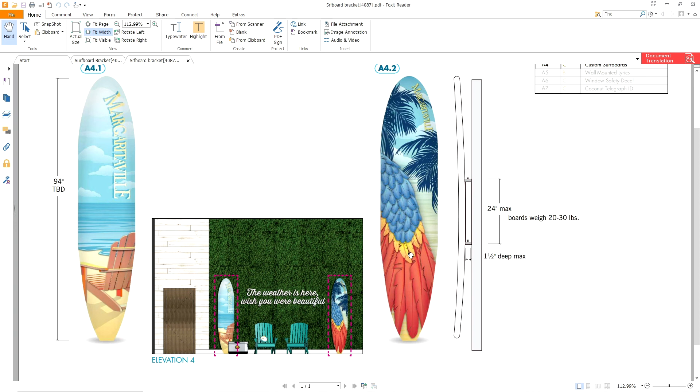So supposedly the surfboard has a spar in the back of it that's wood, and they want a piece that attaches to the surfboard and another piece attaches to the wall. So they kind of were spitballing with this idea. So we have 2.5 wide here. They've got 1.5 deep, and they thought maybe they could have this sit inside there, and then this will kind of keep it from rocking. And it's all kind of a good idea,

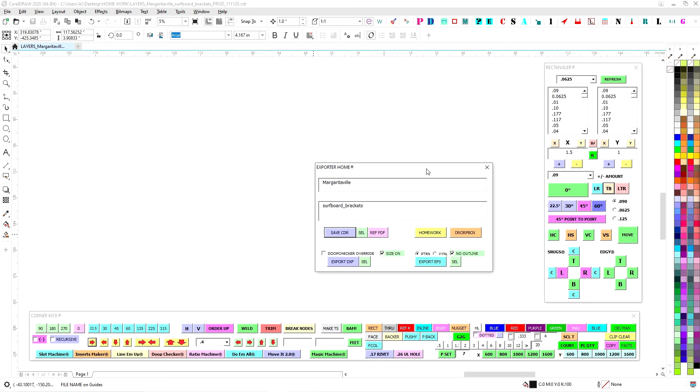but the actual construction of something like this to hold something up that weighs, what did they say? 20 to 30 pounds, just by this little tiny thing, kind of magic system there that doesn't quite exactly work. But they want to keep this stationary, so I understand. So I had a quick idea. So what I'll do is just hit my Margaritaville, and we'll just call this surfboard brackets. And we'll save it. There you go. So that just dumps it into my homework folder, so it automatically saves it without having to do all the nonsense.

All right, so first we're going to create a rectangle here. Since it's 24 inches max, let's just go ahead and use that. And they want 1.5 inch maximum. So I'm going to do my left right here. I got it set for 090. And what that's going to do is give me a bracket that's already set like that. So that gives me a 090 on one side and 090 on the other. And it's all to size, and it's already converted to curves and everything. So I get rid of that. So now I have this piece of angle here.

And then what I can do is use my extruder. And I believe they said the wall bracket would like to be 2.5. Yeah, we'll take it. We'll take everything we can. So I'll go over here and go 2.5. And over here I can just go ahead and hit that, and that gives me 1.5 by 1.5. And then that gives me my profile extrusion. I'm going to hit this button here, that turns to 270. So that way we're good to go. And then what I like to do is color code it, so that way later I can tell which one's which. So I'm going to make these blue.

So the wall bracket, which I'm going to go that way, is blue. So I like that. And then what I'm thinking is this will be completely enclosed, so it'll look nice. So if you walk by and look to the side, this will be closed up. And then we can hide everything we're doing on the inside. And it's going to really keep it stationary, like hardcore stationary. So off to a good start. And so what we're going to do now is figure out, they kind of have this, I like the idea of that. So I'm going to duplicate it the way we do.

So I'm going to take this and flip it, and I'm going to rub it down, and I'm just going to slide it down a little bit. And then we're going to use rivets to hold this in. And then I'm going to create another one where I flip it and bring it up a little bit and put rivets. That way there's room for this to clear. And then that will give a landing platform for this guy to come in.

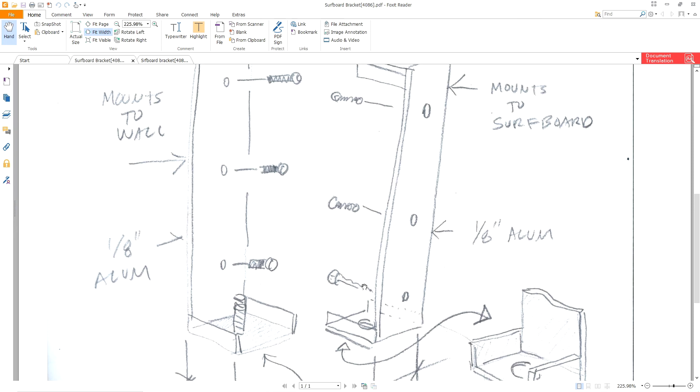And I'm going to go ahead and make this one go the opposite direction, and it'll be a condensed version of this that'll come down this way. And then that'll give a platform for this to rest on. But I'm going to be able to do it all in our 090 foldy method with scribe bends and everything, and it's going to be theoretically pretty straightforward, pretty easy to do.

So what I'm going to want to do now is just make our little landing platforms. So we'll just go 1.5 inches, and we're just going to make them 1 inch tall. And I'm going to go top bottom on that. I'll put extruder over there. And I'm going to get rid of this. And I'm going to make this one purple. I like purple for that.

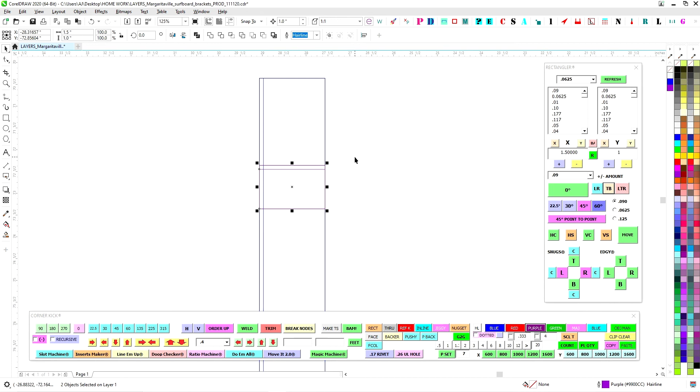And then I'm going to go ahead and line that up. I got my nudge set to 1 inch, so I go 1, 2. And then I'm going to group this, and I'm going to have that hit the bottom. And then I'm going to go 1, 2. Is there a need to go 1, 2 from the bottom? I don't believe so. I can go 1 from the bottom because it's going to be like this. Our mounting system is going to come in like that.

So this is 1.5 inches. Now what I want to do is shrink this to 1. So let's see, what do I want to do? I want to go ahead and shrink it by 1/2. So what I did is I have my shrink down here. So I shrunk both sides by 1/4, which brings it to 1 by 1. So we're good to go.

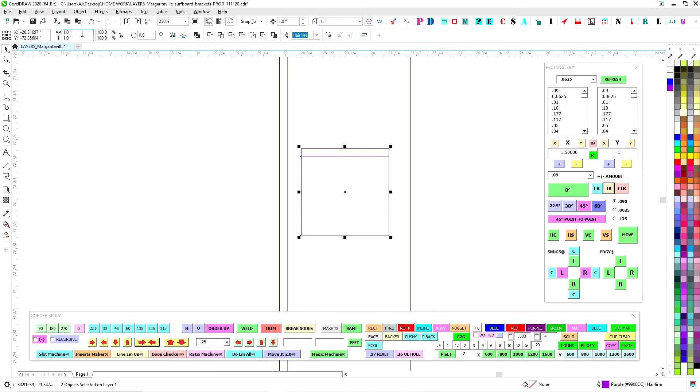And then I'm going to take this guy and just bonk him up against that, like that. There is no setting in Corel that lets you go edge to edge. It only goes left to right or whatever. So I created that. That just lets me align things directly to the right side of something. Okay, so

You know what? I'm thinking we'll just go ahead and undo, and we can just shrink this guy by 0.1. And that gives me clearance. I like to have a 0.1 clearance when I'm riveting everything together when we're doing this foldy stuff. So I'm going to bring this to the very bottom, and then the bracket for the surfboard will start here and go up. So it's okay to bury this to the bottom there. And it can be all the way across, so that's good.

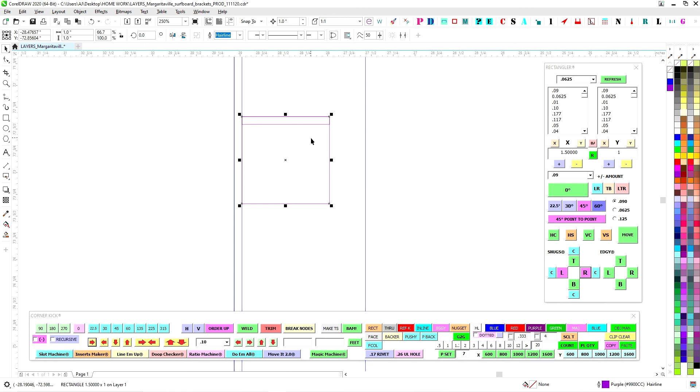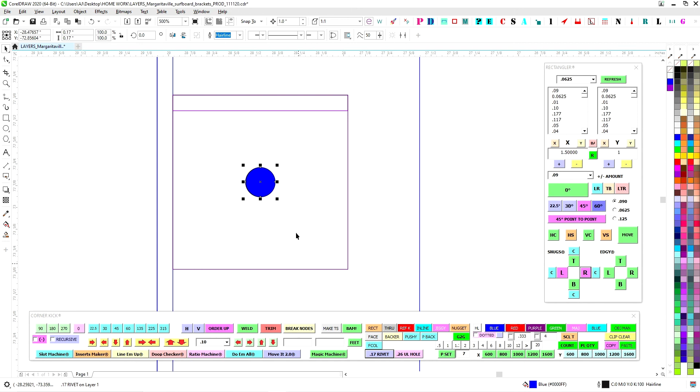This one though is going to have to be cleared because the bracket's going to come in and then it's going to come up here. So now that we have that, let's set up where our rivets will go. You come over here to your 0.17 rivet button down here, and I hit that. That's set up for 5/32 rivets, which we like to use. So I'll hit that up into the center here. And since we don't really have room next to each other, I have my control nudge set for a 1/16. That might work. Yeah, that's good enough.

And then I'm going to do the same thing down here. So we'll hit a rivet, do a center, 2, 3, 4, 5, 6. That's good. 1, 2, 3, 4, 5, 6. There you go. 3/8. Good job. And then we'll go ahead and ungroup this. Every time you do your scribe lines and we bend something, the part you clamp grows by a 1/16. So you have to adjust everything by a 1/16.

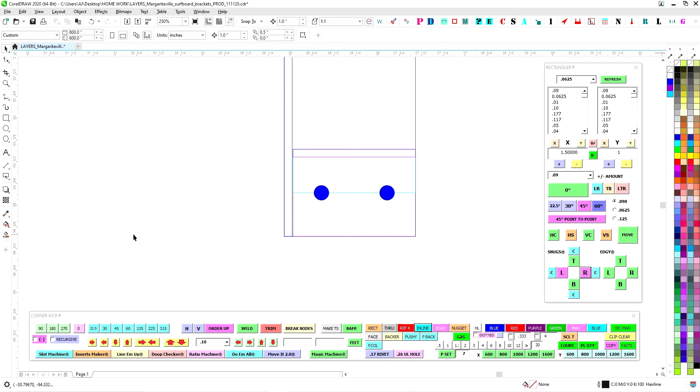So I like to make an inline reference marker. I'll just duplicate this, slide it up to halfway, and then I turn it into an inline. I go down here to this blue button and hit inline, and it will change it to this blue line, and it renames it to inline, as you can see down here in the corner, inline on layer 1. So later on, when I hit my scraper and take care of all this stuff, it'll just easily peel all this out. So I'm ready to send it to the router. I don't have to go through and hand pick this every time.

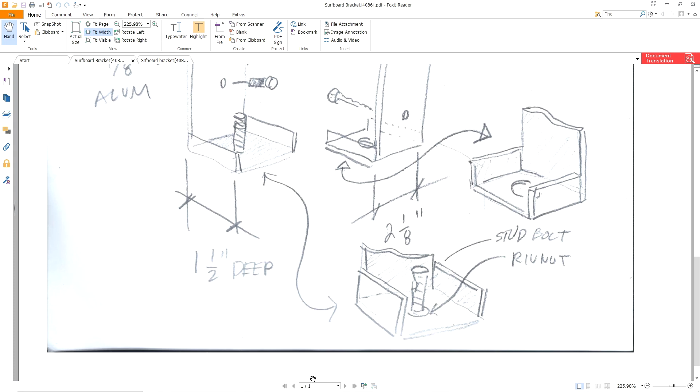So same thing here, we'll duplicate this, slide it up, hit the halfway point, and that's my inlines. All right, and then we're going to want to do some sort of a riv nut deal that catches that. I like this idea of the riv nut stud bolt going through there. So I come over here to my inserts maker, and I have riv nuts basically all from McMaster Carr, all set up and ready to go.

So I'm thinking 5/16 might work. So we try a mock-up. This gives me the actual dimensions. It might be a little big. I'm thinking 1/4 is probably fine. So it gives me a mock-up there. So I'll hit that, I'll slide that in. We'll just hit that in the center so it's easy. And then we'll do the same thing down here.

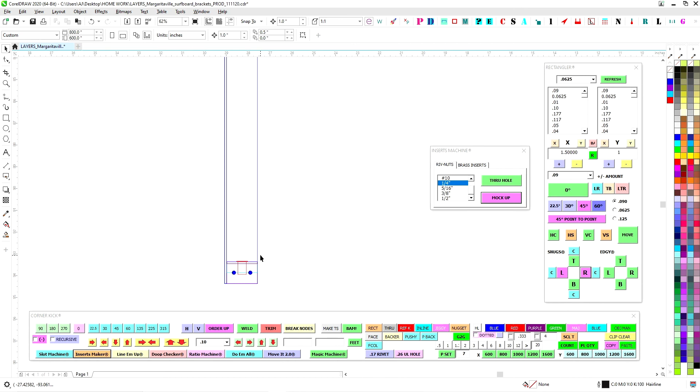All right, so that's off to a good start. So that'll be our wall bracket. And then what we can do is let's flesh this in.

So we go ahead and hit, since this is 1, we'll hit the X over here. That loads that, so I don't have to type it. And we're going to go ahead and just load this dimension just to be easy. And we'll go ahead and hit.

So since we're making a 090 kind of extrusion, if you're looking at it from the top, it's going to be 090 the length and then 090. So I'll hit top and bottom. So that gives me that.

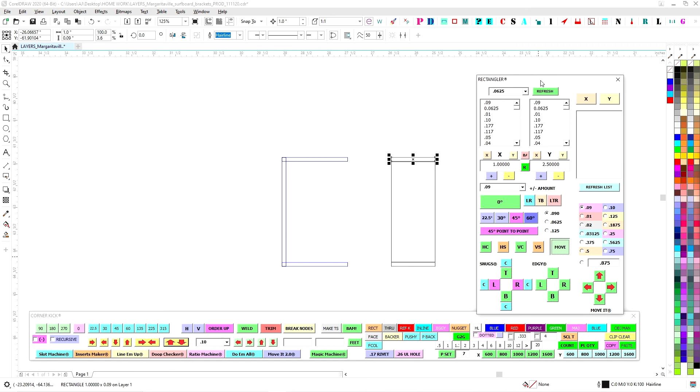And then what we're going to do is we need to shrink it the proper amount to be able to slide in there. And so knowing what I know from what I do, we know that that's a 0.01 on both sides. So I'm just going to hit these buttons right here, and it's going to shrink that. And then I can go ahead and move these by 0.01 and just be done with it. So I'll hit that and I'll hit that. And we're good to go.

Now I'm going to make those, yeah, we already made those purple. We like purple for that, so that way it keeps the color coding. So hit purple for that.

We're going to group that. And then I'm going to go ahead and just go to the left, and then I'm going to move it 0.01, just like that. So that gives us our 0.01 clearance we like around everything when we go to rivet everything together. And I'm going to go ahead and move this to reflect that because I haven't moved that yet.

So I go over here, I have 0.01 all set up because I keep my nudges. My nudges are in amber, you know. They'll be digging up my nudges in amber a million years from now because I don't change them. I have 1 inch for nudge and I have micro nudge as 16th inch.

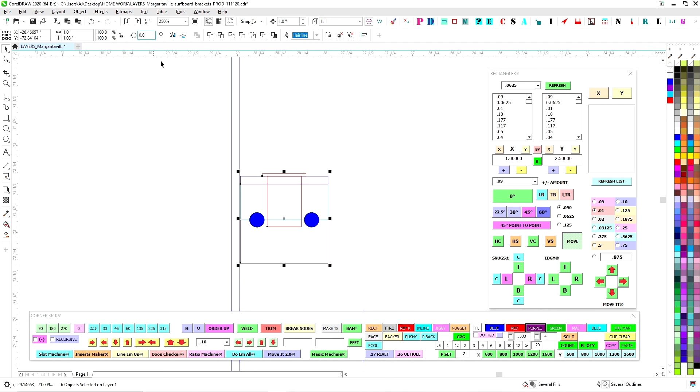And any other stuff that I need to do, I just have this move thing set up real quickly. Instead of going in and changing my nudge or going up here and typing it in like an animal, it's easier just to have the hot buttons here. So, all right, so we have that set up. We have that set up.

So what I'll do is I'll make a top and a bottom one. So I'll come back to my inserts maker. And I'm going to put my through hole for the 1/4 inch riv nut, and it's marked right here down at the bottom. You can see it's already named 1/4 inch riv nut, and it's 0.41, which is what the manufacturer kind of suggests. And we'll put it in the center there.

And then just to make sure, because we're paranoid, we want to make sure that they line up. So I like that guideline. That's all lined up there. I like that.

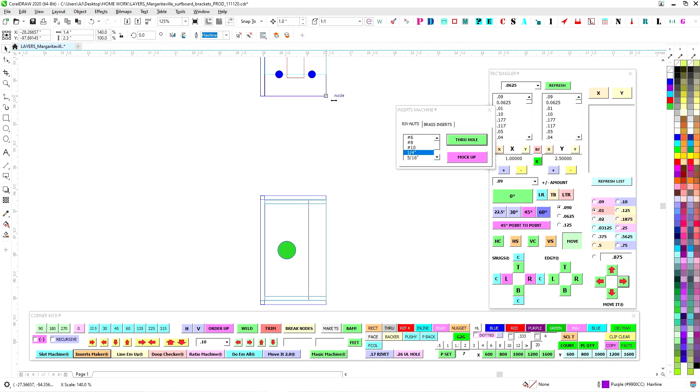All right, so that's the top, and then what I'm going to do is just come down here, and I'm just going to make a bottom one since now we have an asymmetrical part, so it's not duplicated the same. So I'll just stretch this, and we'll just go to node, snap to, and we'll just line those up. So that's the bottom one, that's the top one. So those parts are basically made because now you have the side piece and you have the top piece. You're ready to send that to the router.

So now that we have the wall piece, let's talk about the middle, the board part. So the board piece will be basically this size, but I might shrink it just a tiny bit more so it's easier to slide in on the wall.

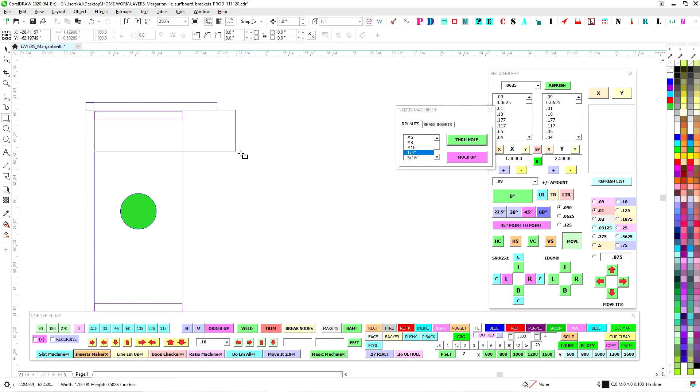So what we want to do is go ahead and go to node here, and we'll go to here. And we can just drag that to that. That'll be the inside.

Let's go ahead and name that, or what we'll do is shrink it, convert it to curves, and shrink it. Let's do 0.01 on both sides, which matches that. And then I want to go ahead and go 0.05 on both sides and give it a little bit more. I don't want to make it too floppy. I want to have a nice sealed slide-in feel, kind of like when you're opening an Apple iPhone box and it takes 4 minutes to open because it's so tight.

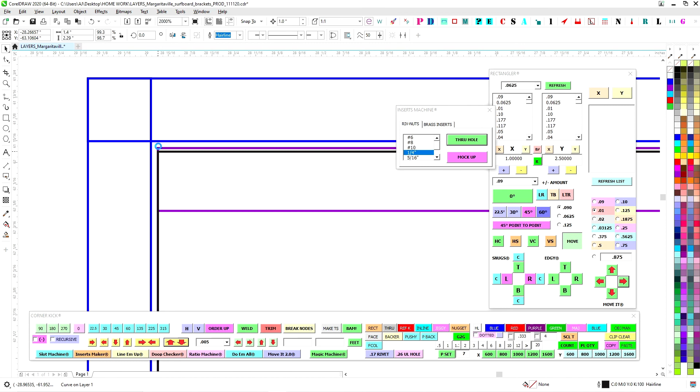I like it. So you're going to go ahead and put that right there. And I like that right there. So what I'm going to do is name it a rectangle. It's going to convert it to curves. And we're going to go ahead and use red for the part that mounts to the board.

So now that I have this weird size, what I'm going to do is go ahead and hit X and Y, and I'm ready to make - actually no, let's do extruder machine here. That's what we want to do. So we want to do X and Y and X. There we go. And we'll hit that with a 270, we'll hit that with the red, and that's going to just tuck right in there, and that's going to be our homie.

And so now what we're going to do is just duplicate what we did to this one. And what we'll do there is, let's see. So we're going to use rivets on this one to make it fast and easy.

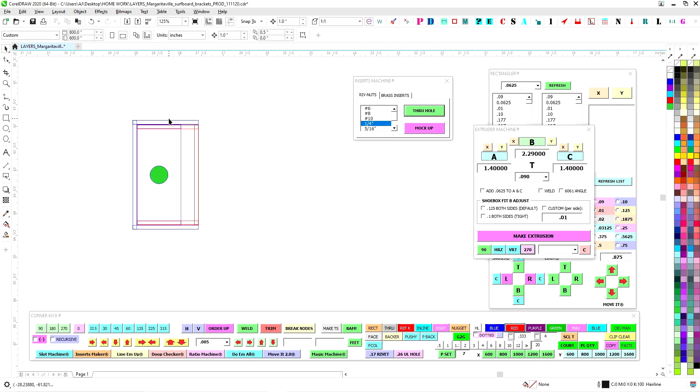But on this guy, we're not really going to be able to use rivets per se. We might have to end up, unless we clearance for rivets - I don't know if I'm digging that though. Otherwise, we might have to end up tacking this side in. And they could tack the other side in. We could tack these in too.

Either way, if I clearance this for rivets, will that work? Because your rivets are 0.05. So do I want to just use the rivets to hold it in place, or do I want it to actually sit up against there? Let's just keep going with what we got here. Just start fleshing it in.

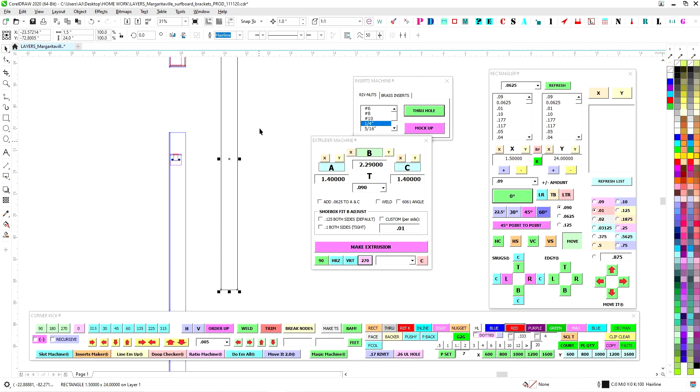All right, so we know that we're going to go to here. So let's go ahead and go Y, and we'll go X, and we'll make a box there. Actually, you know what? Let's do the left and right on that. I don't need you guys. Thanks, you don't spark joy. Left and right. Let's go ahead and hit that up, red.

And then what we're going to do, let's see what we want to do. We'll go ahead here, and then we'll take the red guy there and we'll shrink him up. So we're going to shrink him up the 0.1, which is the 09 plus the 01. That's what we want. There's our clearance, 0.01.

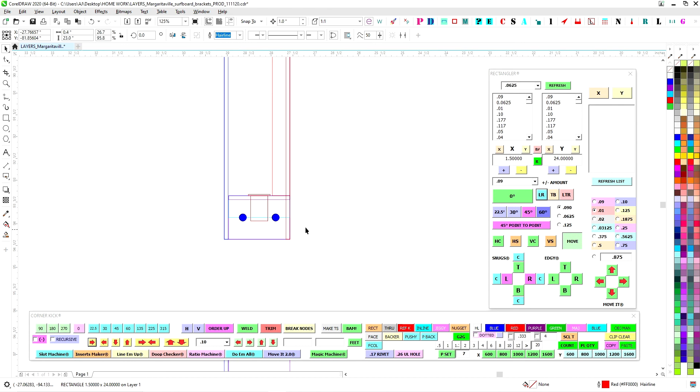All right, and then the idea is to have this clear this. So what I'm going to do now is just bring that red to this point right there. There we go. And then this guy here is going to be short, and it's going to actually sit on top of that. And then it's actually going to sit on top of the rivnet.

Yeah, I like that. And then I'm going to go ahead and give this a little bit of room. No, we'll leave that, we need maximum because we only have, that's only 0.4. So we want to have maximum strength there.

So now what I'm going to do is add a little gusset thing that comes out, and it's going to rest right on the rivnet. So we're just going to take that and weld it. So I have a weld button right here, so it's real quick. So I don't have to go up here and do Control, Alt, Delete, whatever the heck else goes on.

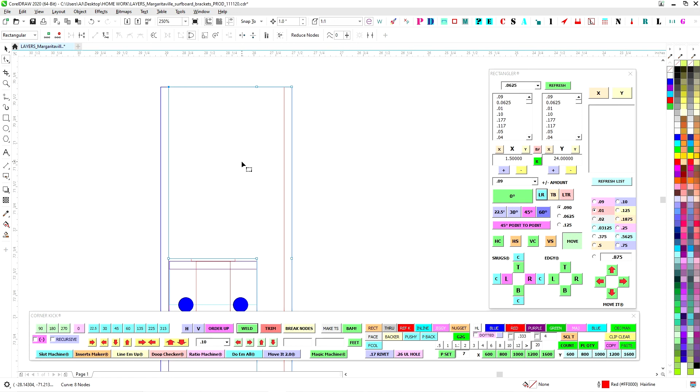And then what we're going to do, let's see, what do we want to do? Do we want to just leave that like that, or do we want to bring it down? Make it like that, why not? Bring it to the front.

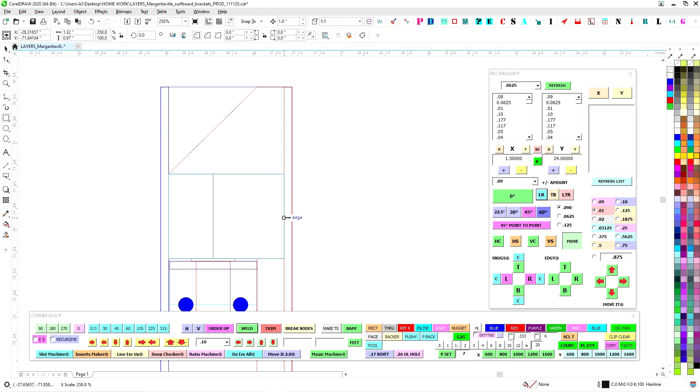And then I'm going to do kind of the same thing we did here, where I'm just going to bring a piece that is that size. So I'm going to go ahead and shrink it 0.01. And then I'm going to use that to create my top and bottom, left, right. So I'm going to go X, Y, top and bottom, and that creates that.

And then I think we're going to make that green. There we go. And then we're going to go ahead and do this like that. And we'll do what we do to the center.

1, 2, 3, 4, 5, 6. 1, 2, 3, 4, 5, 6. Something like that. Yeah, like that.

And then do our inline for referencing to make sure we move it when it's time to move it. And then we kind of do the same thing down here.

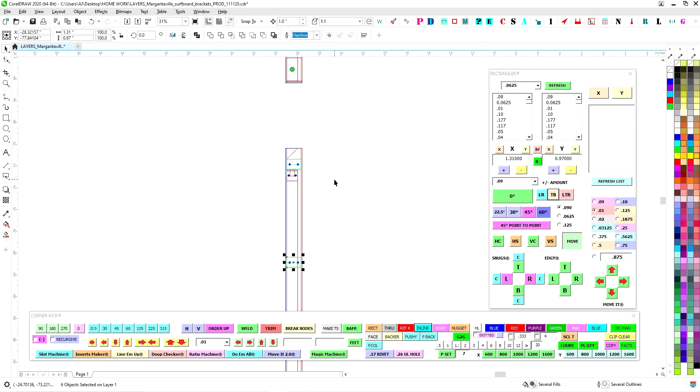Ooh, look at that. Lines right up. Blink.

And then we will go ahead and do our add-on addition thingamajigger here. Go ahead and weld that and bring it to the front, and then we'll give this some room as well. Make it look stylish. Also gives it a little bit of support. Let's move that up another inch. There we go.

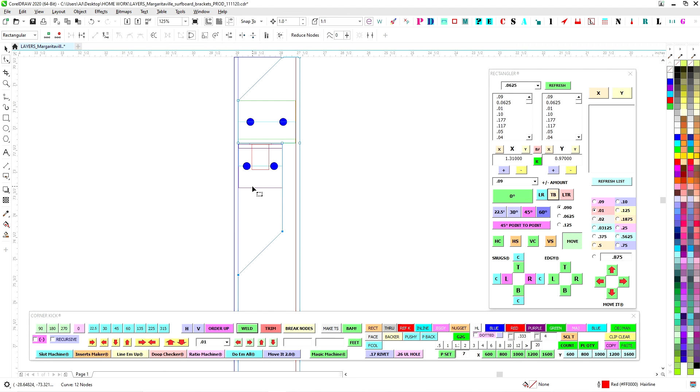Guess there really isn't any reason why this can't go all the way up for strength. There you go. So all it really needs to do is clear this, and then once you get clear of that, you're back to having that. So you can keep this whole thing nice and sturdy.

Alrighty. So the other thing now to do is to create this piece in this view so I can have that. So I go ahead and hit that like that.

Just go ahead and do it by hand here and then shrink it. And then I'm going to shrink it 0.01 on both sides. Click. And I'm going to shrink it on this side. Click. There you go.

And then I'm going to duplicate this because I need it top and bottom again. So I go X, Y, and then I do top and bottom, and I make it green to match what we're doing.

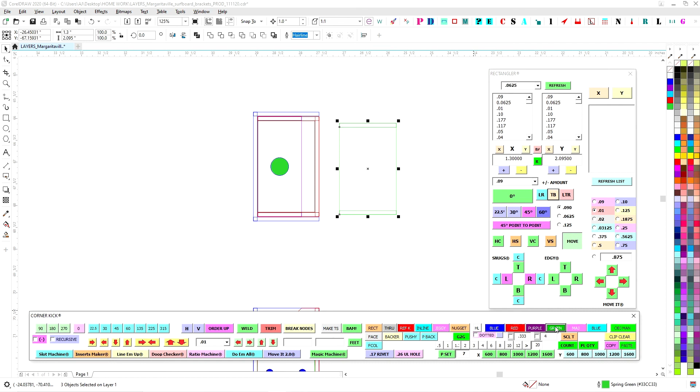And then I'll just use that. Let's go ahead and group it so it's easy. Group it.

Oops, wrong one. There we go. And we'll send that to the bottom so we can get rid of this guy. Thank you for your service. You no longer spark joy.

And there we go. And so then what I'll do is, should we make an oval or should we just make, so this is a 1/4 inch bolt that's going to be going through the riv nut.

Hit the slot machines, let's play some slots. Do we do a slot? Maybe just the slightest slot, so that way there's just a little bit of wiggle room.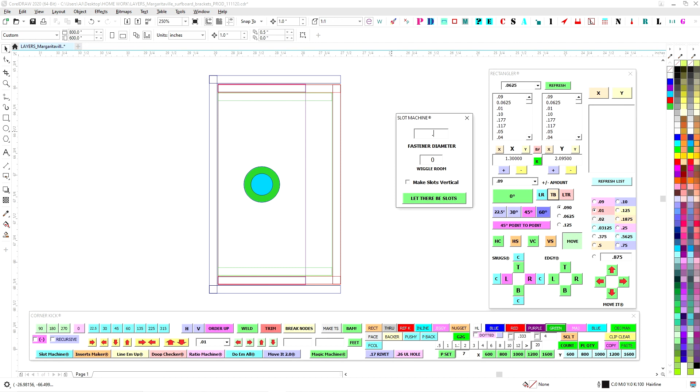They could always use silicone to sort of hold these on to make sure they don't move. So let's say we were to do a 0.28, actually let's do a 0.3 slot.

So that gives me a slotted, let's make that see-through so you can see what's going on. But that's a lot of play. I don't like that. So what if we just tighten it up?

We'll just switch to nodes here. And that way it'll have just the tiny bit of oval, just enough. If they have to, they can get their drill out and fix it. All right, I like that.

So that's this piece and not this piece. So this guy's all set to go there. That's this piece here all made.

Let's see, this guy here, we're just going to duplicate it and kind of do what we just did. So we have this piece, but we'll just bring it down and make it quick.

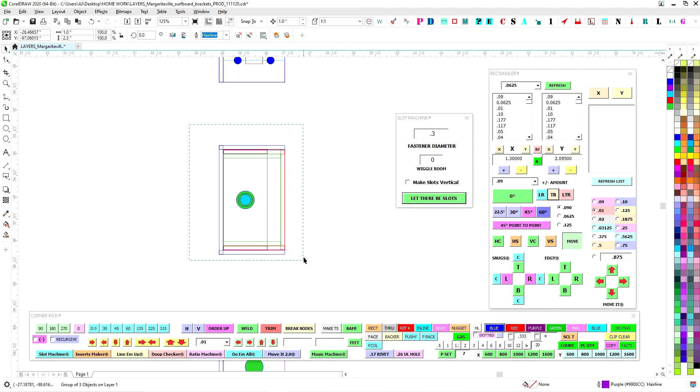And so what we'll do is, oh yeah, we can just leave it. Actually, we can just transpose this onto this. Don't need you anymore. Oops.

And we'll just nail that to that. Yep, I like it.

So these two pieces are the same for top and bottom. That's kind of good. No, they're not. No, because the holes are in different spots. That's right. Yep.

Yeah, that's forward. So you got to make sure we have a top and a bottom.

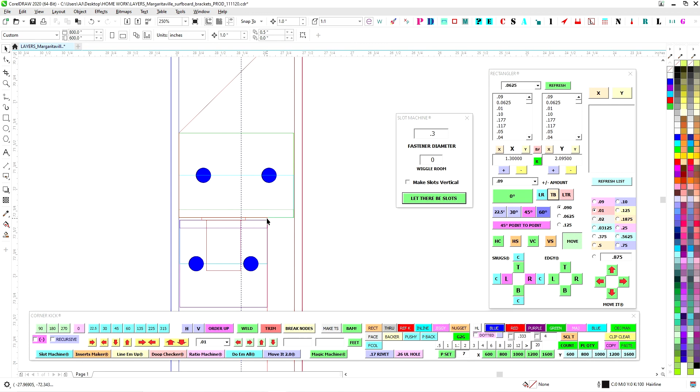All right, and then what I'm going to do is I'm going to give this just a tiny bit of breathing room here. Oops, do we want full 16th? No, let's just give it, so right here, this will move nodes as well.

So, I mean over here, I'm sorry. So let's do a 0.02. I'm selecting 0.02 over here, and that's just going to move those two nodes over 0.02. That should be enough. And then our router bit's going to radius this.

So I'm going to go ahead and take this slot machine here, the little trick we do. I'm going to do 0.26 because the biggest bit we usually use is a 1/4 inch. So even if he's using a 1/4 inch, the router guy, he'll be safe.

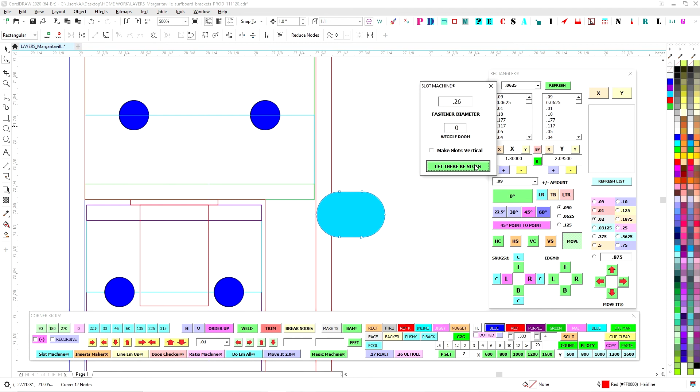So what I'll do is turn this 45, go into this corner here, and move it up 01 and 01. I'm going to make this a full filled color so it's easy to see, then grab that and hit the trim button. That takes care of it, and I'll delete that. So now I have my trimmed out corner, so the router bit will clear that out and won't conflict.

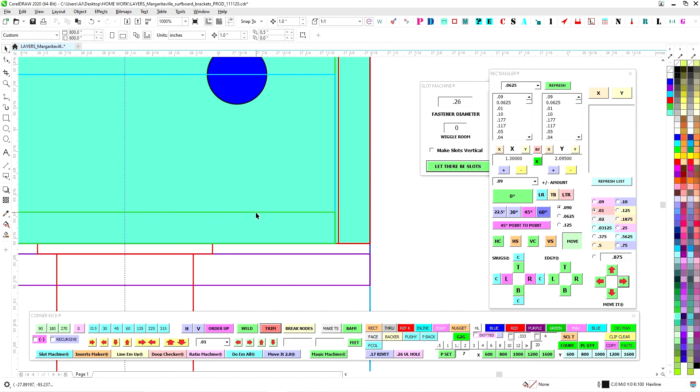Otherwise I think that's pretty good, I like that. Do we want that to bottom out against that? I think we do, right? Is that what we want? We want the green to bottom out against that? All right, I don't need that green anymore. So I think that's a pretty good strategy, a pretty good idea for how we're going to do it.

So we're going to need to add some bolts, some bolt holes. Mounting hardware wise, these guys will probably want 1/4 inch on the wall. So we kind of get these where they fit in.

I'm going to go ahead and select these two, and I have this one where this is edgy. With Corel, if you hit the top button, it just puts the tops of the two even. I don't like that because most of the time I want the center of this to be at the top of this, so I had to write code. If you hit the T over here on edgy, that actually puts the center of this to the top. So now we're at 0 center because everything's on center.

So I'm going to bring this down 1 inch, and that brings us into this pocket area where this will be clearance. There's plenty of room in here, this little pocket area, so that'll be a good spot to put whatever lags or togglers they're using. And then same thing down here.

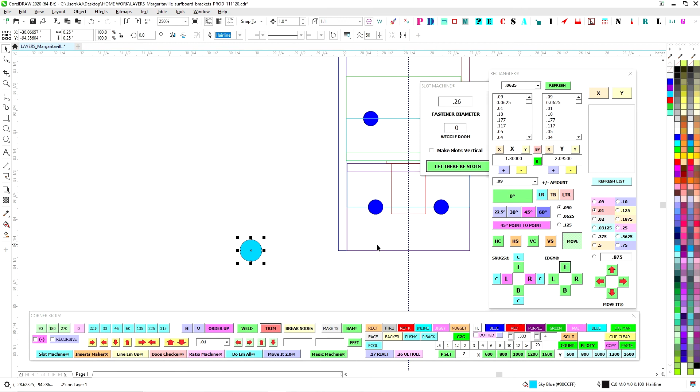This is only a 1/2 inch, so we might actually want to go up a couple inches, maybe do 1.5 inches. I want to move it back down 1/2. There we go. So we're close to this, but I don't want to be that close to that edge. If we hit this, it'll tell us our on-center from each other. Right now I'm at 21.5 between these two, which is a little too much, so I'm just going to put one more. That should keep it happy.

So we'll hit this right here, got vertical centers right there, VC, done. So that's a good mounting system for that. If they're using togglers, they shouldn't go anywhere — you put too many, you're going to perforate the wall and it'll just come right out. So for the surfboard, they're probably going to use wood screws.

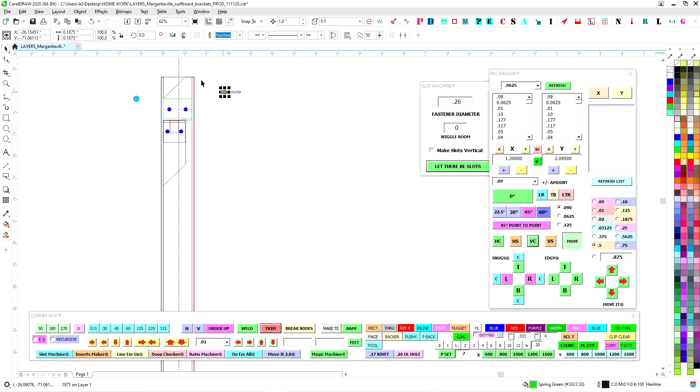So maybe we'll do a 3/16 hole. They can always open it up — you can make the hole smaller or bigger. Well, you can't make them smaller, not without some welding.

So let's go ahead and bring that down 1 inch. This is kind of a whole different deal, so we'll bring this down. We'll line that up to the bottom like we like to do, since he's starting there. And let's put that up 1 inch.

Then what we're going to do is we don't want to make these in a straight line because then it's going to be kind of wobbly. So once we're good to go on this, we'll move these to the left and the right, kind of stagger them. There we go. So now you have the side view, everything's built, and you've got the top view of everything. That's all you need for that.

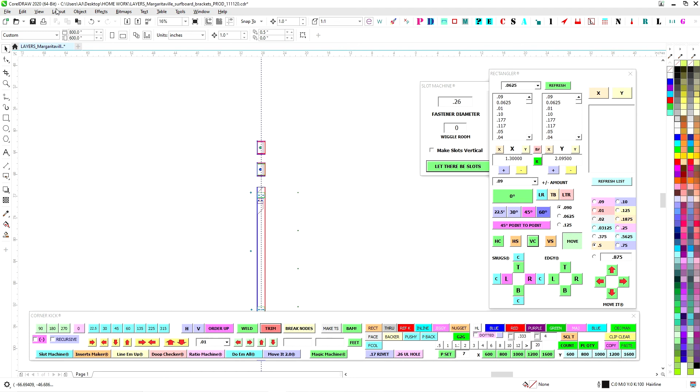So now we can start laying out the parts and get them to route. Go ahead and save it — it's always fun when it crashes and then you're just crying. Shrink that.

All right, so let's make the red piece first here, just for fun. There's no real particular order, so we can get rid of everything we don't need — we don't need that, we don't need that. Expose yourself in a clean way, expose yourself, tell us what you are. There you go, so there's the red part.

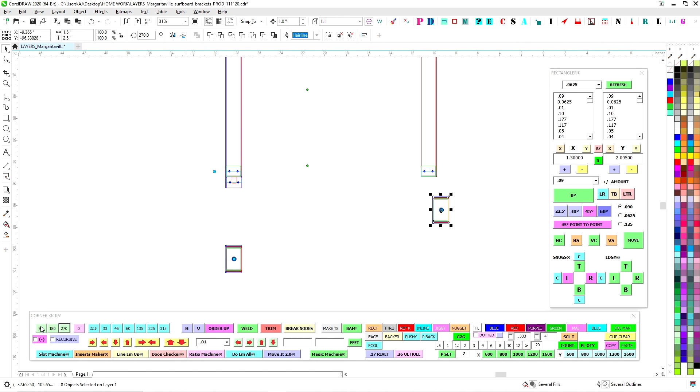Then what we do is peel this over here, turn this 270, and now that's the top. This is the width of that part, see right there. So we get that in line, and then we can go ahead and get rid of everything we don't need for that — we don't need blue, we don't need purple, but we do like green. We don't need green for this per se, but it's part of this. So that's the top, and then the bottom we'll do the same thing — give that a 90 turn, and bring that right into that node there, like that.

And we don't need that. All right, so that's the bottom one, and that's the top one. So we've got our width. So I'll grab the X on that. That's 2.29, and I'll grab the height on this, and I'll hit that, and that's your main piece right there. I'll hit that for red, and we'll just go ahead and line that up to right and top, just like that.

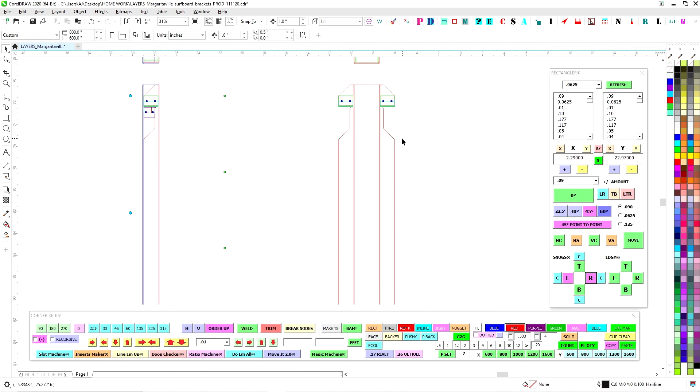And then what we're going to do is duplicate this guy. I like to just throw a quick group on it, do a flip, and then do a right side align, and there's our part. Like it. Then what we do is just ungroup everything, and we'll just go ahead and leave it for now. So that's that part. We'll flesh it all in a sec. And then I like to duplicate this, and we'll just line that up. There's our holes. But again, we don't want to do them in a row like that.

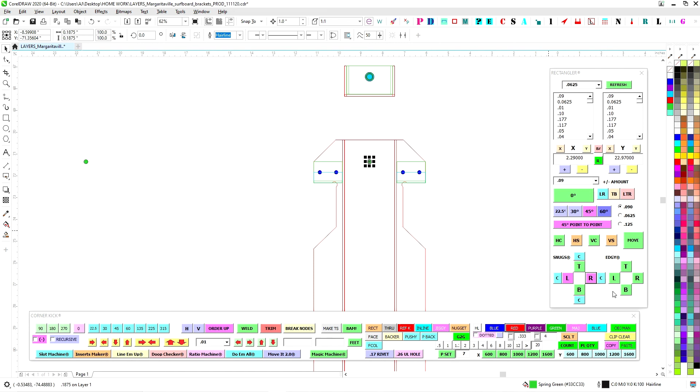Might even be room to do two aside, where we go. Let's see, move. Should we do like a half-inch move there? Do a half-inch, because it is a 2-inch wide spine. Yeah, that might work. We'll see. Anyway, we'll jump off that bridge when we get to it. And then we're going to do the same thing here. We'll go this direction. So we'll get rid of everything that doesn't apply, which is that, don't need red. There we go.

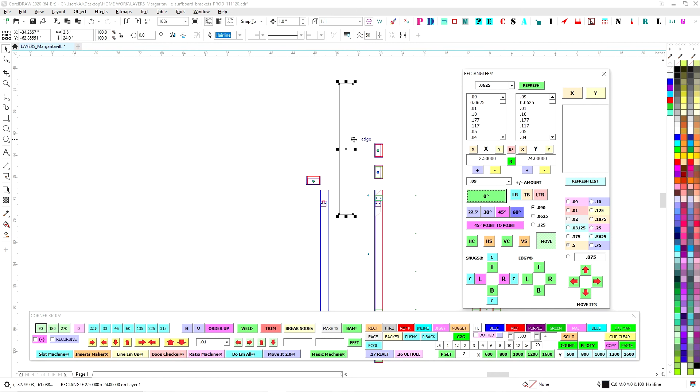So we'll go ahead and do this guy here. Give this a 270 turn. Line him up. Hey, talking to you. No. Oh my gosh. Come on now. All right. So there's that. And then we want that one. We're going to turn this one 90. Boop. And click it in like that. Playing with Legos. So there's my X, which is 2.5. There's my Y, which is that. And I'll go to the left and centered. That's a blue.

See, and I'm keeping everything in line too, so that way I can reference all the way across. So my side profile matches the top of that, and this guy stays in that profile there. So I can discount double check all of it. Flipperooski, and, oh, grab the wrong one. Come on, let's go down here. Node, and node. All right, I like it. So save. And then this guy, we'll go ahead and make them in a line. It's good enough. When they torque it down, it'll be fine. It's only 2 inches wide. It's not going to wobble back and forth too much.

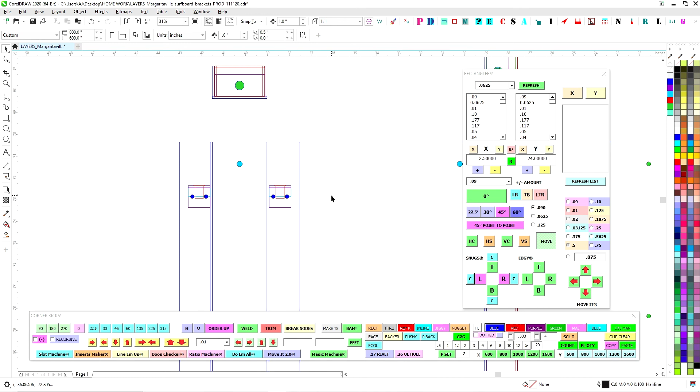All right. So now what we do is start fleshing it in. So we need to make this one solid piece. But I like to leave all of this stuff for reference. Oh, you know what we need to do is, let's go ahead and ungroup all of this. And what I'm going to do is duplicate that. And I'm going to make these as inlines because I need to have reference, because like I said, when you clamp and bend, the part that gets clamped grows by a 1/16 the way we do things. So I need to make sure that I have a reference mark that shows that this did indeed move, so that way I can make sure that everything lines up. Otherwise everything's off by a 1/16 and it makes you sad.

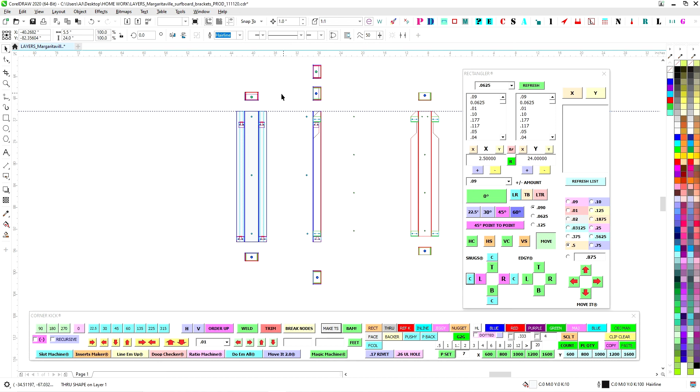All right. So there's that. So now what we're going to do is make this a solid piece. So I'll select the whole thing, and down here I have make TS, which is a through shape, make through shape. So what it does is it just takes the overall dimension and just creates a rectangle that is already filled, and it's named through shape, and it sends it to the back of the layer. So now all those pieces, that's our piece right there. Good to go. So same thing here. So what I'm going to do for this one is go ahead and ungroup everything.

And then I'm going to go ahead and make a through shape of, I'm going to go ahead and get rid of that. I don't need that guideline. I'm going to make a through shape of this size. And then I'm going to take this guy, duplicate it. I'm going to take this one and duplicate it.

And then, because of this weird shape here, that way, I'm just going to weld that to that. And then I'm going to send it to the top of the layer to make sure it's welded properly and it's not disjointed. Send it to the back of the layer. And then I'm going to take that, and now I'm going to hit weld. I'm going to send that to the top of the layer, send that to the back layer. All right, so we're good to go there.

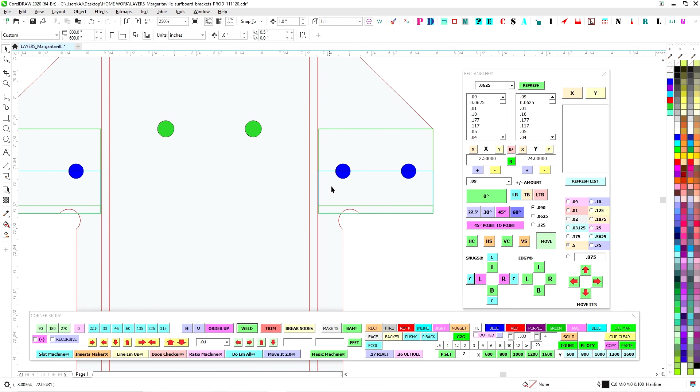And then what I'm going to need to do is make those same little inline pieces for this to make sure things have moved. But I'm just going to keep these local to here. So I'm just going to kind of bring it to there. I don't need to make it all the way down because I think they're actually in different spots. So anyway. And I'm just going to take it to the center there.

And then I can just go ahead and duplicate these. Let's flip it. Smack it, flip it, rub it down. Don't need that either. There we go. Good enough. All right. And then same thing here. Let's just take a rec. Duplicate, flip, and bonk. All right, save it, save it.

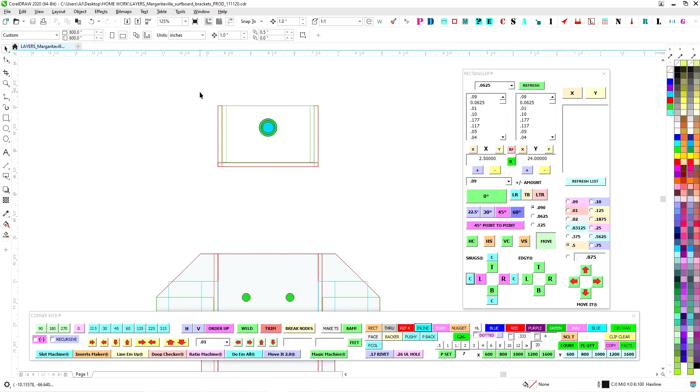All right, so now what we want to do is we can go ahead and shift everything and get it super ready for export. Let's make these pieces first. Let's get everything done and then we'll go through and do all that. So kind of the same drill. You've got this guy here is the side view of this piece, so everything in green. So I'm going to turn this 90, and then I'm going to get rid of this piece, right? And then I can get rid of these two pieces here, ungroup. And then just take this guy and Lego him together like that.

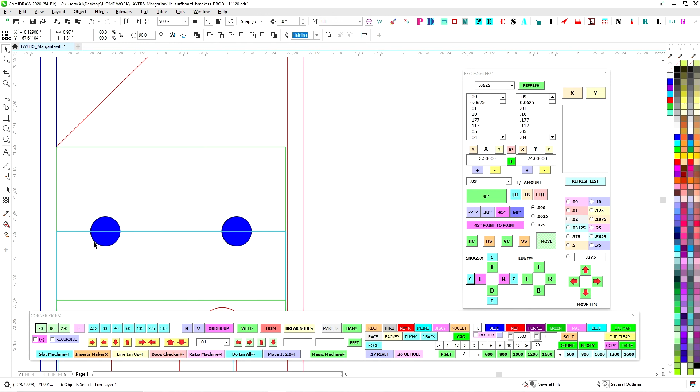Oh, why are we? Let's see. Did I not build in the 0.09 in that? Curious. Oh, I have that bonking against, that's why. That's why. Yeah, no. Is that what we wanted to do? I forget. Didn't we bring that back? Oh, we brought that back. Yeah, we're okay with bonking, I think.

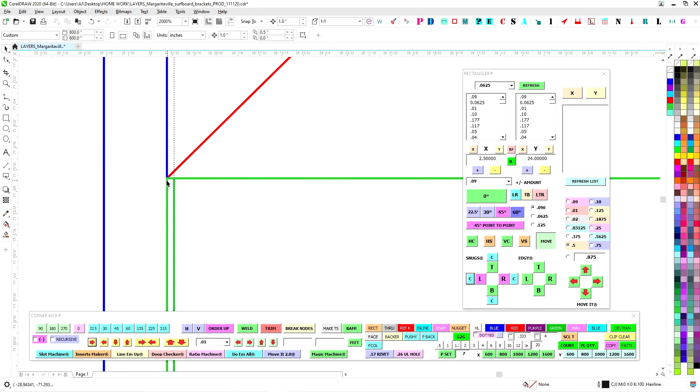So, what do we want to do here? I think we're good with, let's bring that back. So let's go ahead and shrink that back. Let's shrink that by 0.01. See, so much fun. Yeah, that way that matches up. That's what we want. So we'll get rid of that. And we'll give this a 90. There we are.

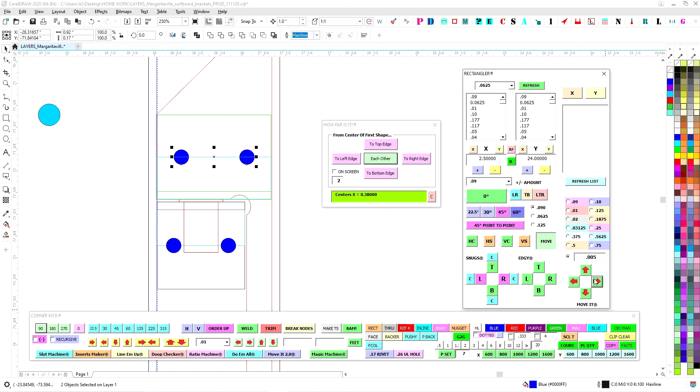And then let's see. What that does though is that makes these off by 0.005. No, these guys are still on center. Are they still on center? No, they aren't. Right. So we got to shift these cats. We're going to move these dudes 0.005 over. There we go. So now we're centered. That's what we want. But we got to remember to do that with these guys. So these guys need to move over.

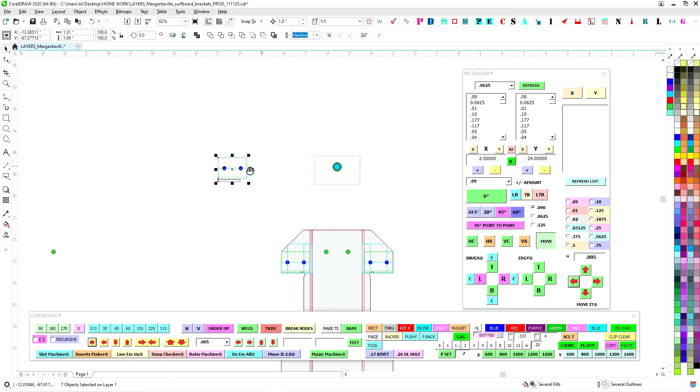Yeah, there we go. And then just need to shrink these by, there we go. Just a little coarse adjustment. Adjust your fire. There we go. So we can get rid of that. And now this is the official one here. And we need to shrink that by 0.01. And just to double check, let's see, to each other. They're still 3/4 inch from each other, and they are still 0.375, 3/8 away from each other from the center of that piece, so we're good to go.

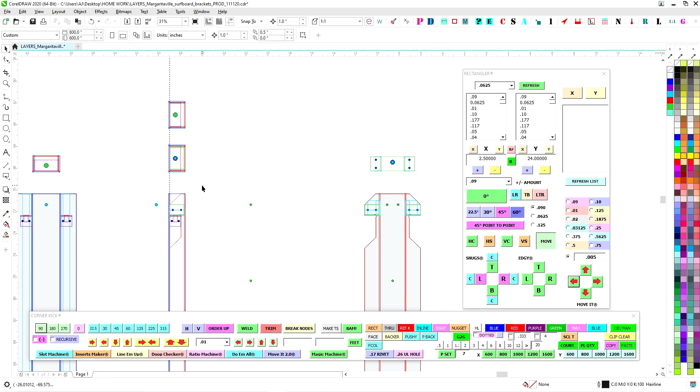So turn 90, click that, flip it, boom. Okay, so there's that piece. That piece is ready to go. And I'm going to go ahead and maybe put a reference arrow, so that way they know the wall. And I'm going to make a tiny little W. We're going to use an engraver bit. Actually, red outline.

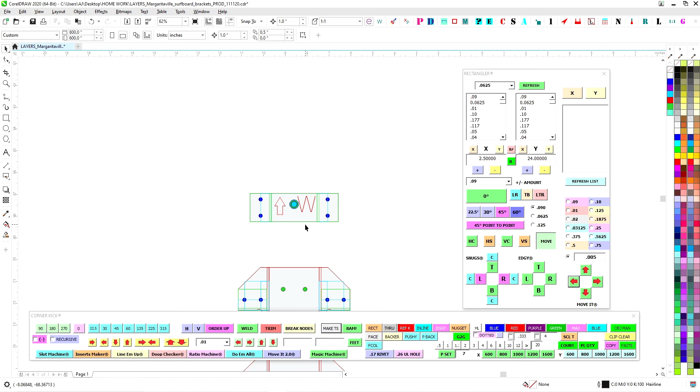There we go. And since this is at 1.5 inches, I'm going to hit over here. I'm going to hit a 1 inch. And we'll put that. That'll kind of let them know that the wall goes that way. Because if they put it backwards, it won't fit. All right. So there's that, save that, and we can make this piece into one piece. So hit that, hit throughs and shapes, now that's a piece. So we got to fix this down here because we need to adjust fire on this guy. So this guy is the same size as this, just shortened up, right?

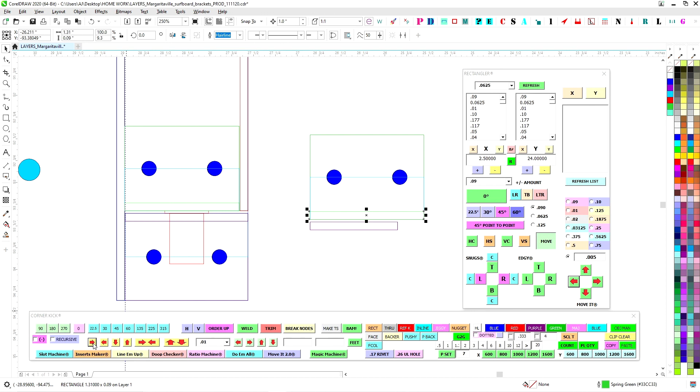Right, so we can just bring him down. Come on now. Yeah, that'll work. Shrink and shrink. And then let's go ahead and just use this for reference. So let's get rid of this. And then we can bring this in for reference, and that clicks right there. Yep, and then that's duplicated, so we can just get rid of that. And then that's fixed. So now we're good to go.

So now we can bring this over to here. Flip it 90, and that should match up this guy. Oops, need to have room, can't breathe. Alrighty, so that's 0.13 and 0.13, yep. Bonk. Ungroup that, don't need those bars, I'm gonna get it confusing. And then we go over here, flip this, look at that. Okay, so there's that piece. Keep it in line.

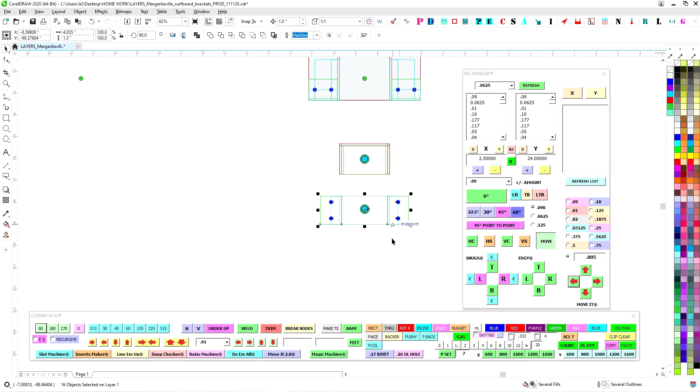And wall will be this way. So we'll go ahead and do a quick arrow like that. And we'll hit an engraver bit, font, wall that way. Let's just go ahead and turn it that way. There we go. So that faces out.

So they'll flip that around. They can weld that in. And then they can rivet or weld. They could probably just weld this side too. I guess it's not that big a deal. If they weld it, probably be quicker. Cleco it and weld it.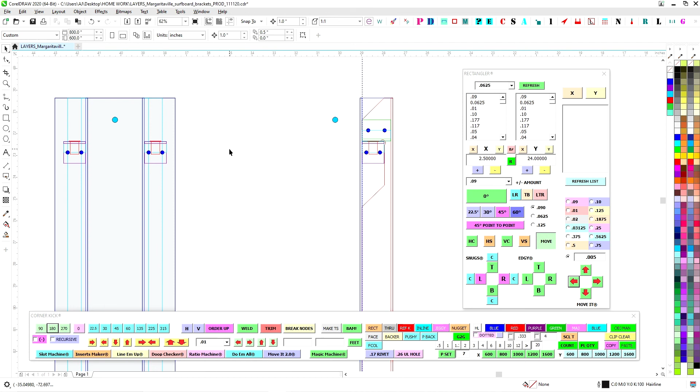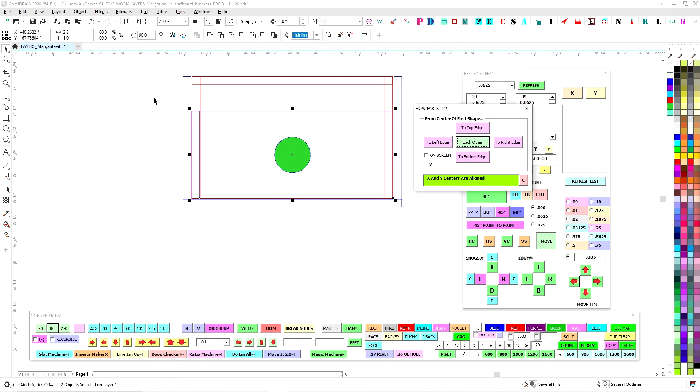Let's see. So we can do that. Yeah, I think I'll do that. I think I'll just hit these up with the double mint. There you go. All right, so there's that piece, that piece. So let's make these little nuggets, little mini nuggets up here. So I think this guy's centered in here, right? How far is it? Yep, so everything's centered there. So all I need to do is take this guy over here, take one of these, turn it to 90, and we're good to go.

Now I don't need the mock-up anymore. Thank you for your service. No longer sparks joy. Alrighty. And again, make through shapes. Boink. Good to go.

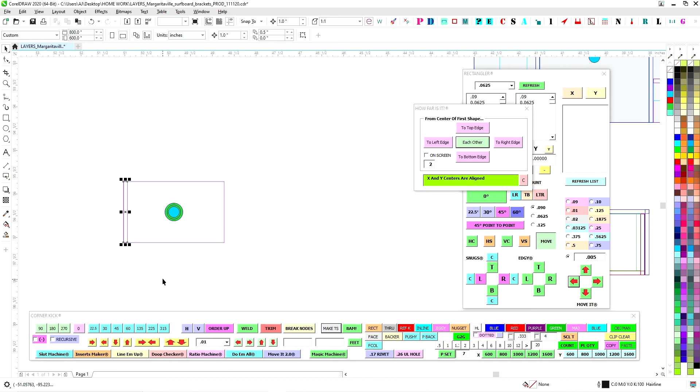And same thing here. This guy is just a little bit bigger, so I'll take him over here, strip him down for what we don't need. Get rid of that, get rid of that, and then we'll double check that this is centered. I think this should be centered. Yep, clear it off, double check. Yep. So then same thing, put this up here, give this a 90, line that up. Don't need you, thank you, don't need you, go and get. There we go. So that's the top piece, and that's the bottom piece. And those guys are ready to go.

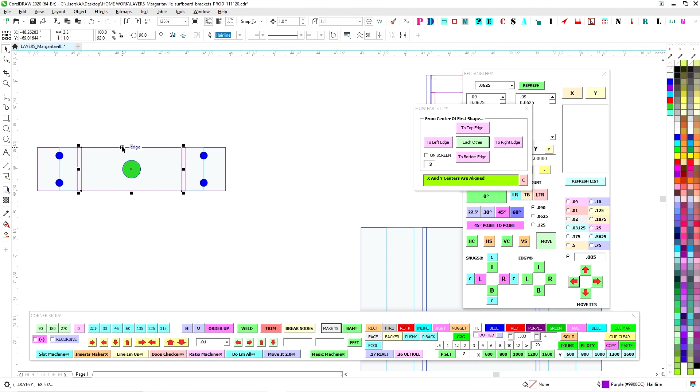So now all we need to do, since we have these pieces, we just need to get them ready. So we need to put bend scribes. So we'll start right here. We'll come over here to the magic machine, click that button, pops it open. Here's our bend scribes. And so we just need bend scribes on the inside here. So I hit this arrow and hit this arrow. There's our bend scribes. So this tells the router to put a nice little, what do you call it, a broach right there. They kind of just make like a reference kiss, we call it.

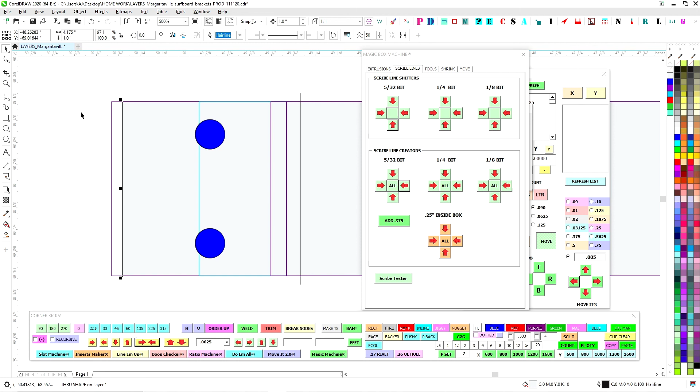There we go. So now I know that the final piece, once it's clamped and bent, is going to grow back to this size. If I leave it, it won't fit. And actually, it probably wouldn't make a big difference if I left it, but I'm just going to be neat and tidy on this one. But this has room to grow, so I probably wouldn't even need to worry about it there. This one I want it to fit perfectly, just nice right there. Otherwise, this will stick down a 16th, and it'll look like, you know, just savages. They'll just be like, who made this?

I'm going to move that a 16th, I'm going to move that a 16th, and I'm just going to shrink this a 16th, and that piece is ready. What I like to do is I'll hit my G2G over here, down on the bottom on my corner kick, and what that does is it gives me a little green dot. If I like it, I'm done. So I hit a green dot, those are good to go. So that way I can step back and sort of do a quick audit, see where everything's at.

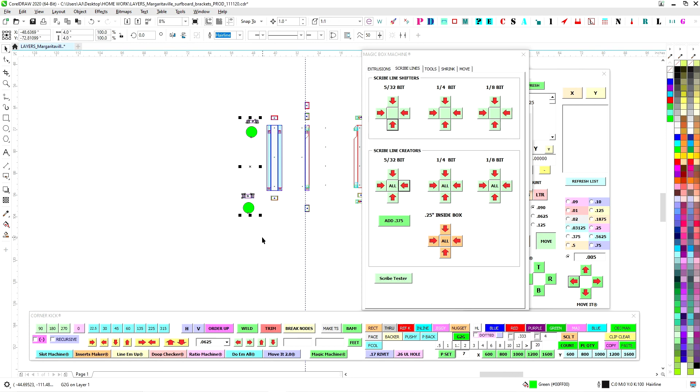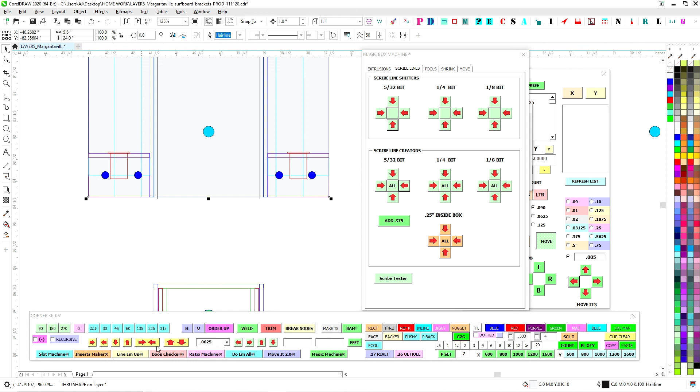I'm going to get a little bit of room there. All right, so same thing here. I'm just going to go ahead and hit my bend scribes left, right. And I'm going to make sure that these all move the appropriate distance. No, I don't have inlines there. But because I'm going so fast, I'm not gonna bother making inlines there because I just witnessed it, so I'm good to go. And then I'm going to shrink this because this definitely needs to stay, because this will grow a 16th and then we'll be kind of pooching out. So I'm definitely going to bring this in a 16th on both sides.

And then what I'm going to do is I'm going to do a scribe arrow right in the center of this. And that's going to be up. Hopefully they know that an arrow means up. And so this piece has this. These guys are moved. These guys are moved. I saw that. I can leave all this. All this is going to get cleaned out later. I don't need to clean all this out. I can leave it where it's at. And so I'm going to go ahead and just call that good. That's good to go.

And so this little guy here, bend scribes left, right, and moved. I saw it move, and I'm going to take it down a 16th. Again, probably don't have to because it's just going to go up, but that way it's going to meet up nice there, and we'll get the maximum style points from Peter Gunn. And we're going to go ahead and go down here. Oh, didn't finish this guy, so make through shape, just that easy. Two bend scribes, shrink, move, and move. All right.

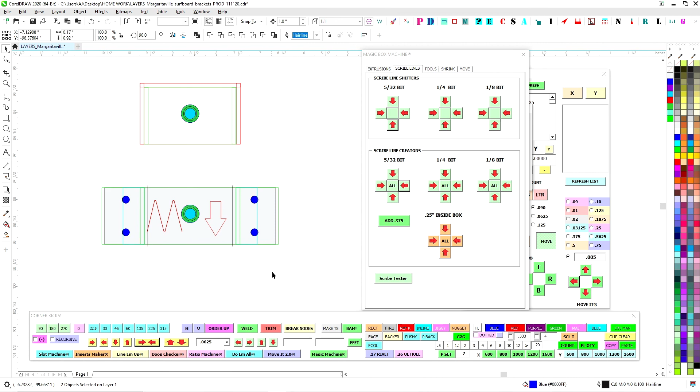Let's see. These guys are the hook, so we get rid of that. We get rid of that, and we're going to go ahead and make that purple. So that's that. All right. So these little guys are good. Let's give them a good to go stamp. And last one. So move these a 16th, move these a 16th. While we're here, let's just give our bend scribes left, right, boom, boom, just like that. And these guys, 16th, 16th.

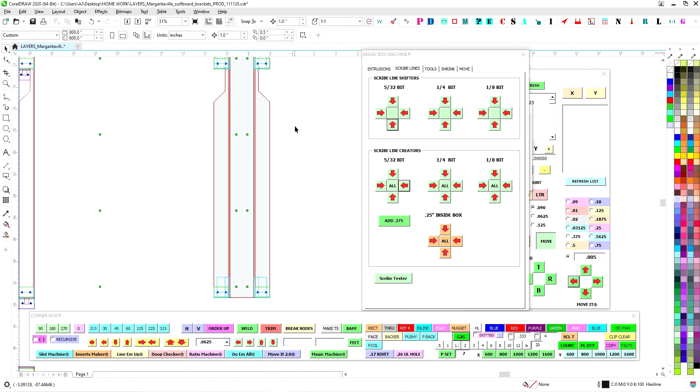And then what we're going to do is we're going to move everything. Now everything's going to shift over. It's going to grow a 16th if I leave it. So what I need to do, and this is why you leave the outer ring for reference. So I'm just going to grab these nodes, and everything has to shift a 16th, which it just did. And I'm going to grab all these nodes, 16th. So that way I can reference where it originally was, and I know that I'm good. So all this will go back. Once we bend it, it's going to go right back to where that line was, and we're golden. We just got to make sure that this also gets transformed as well.

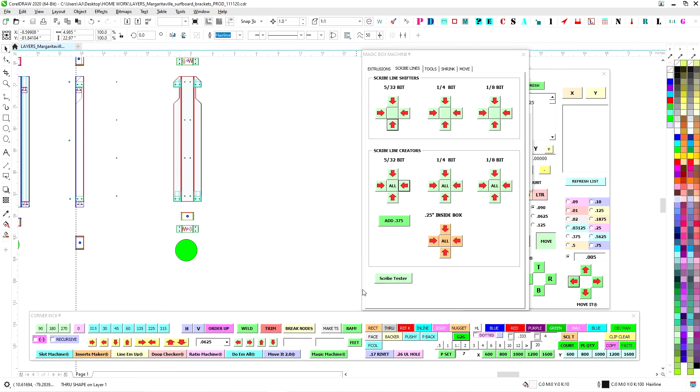All right, save it, save it. Good to go. I like this piece. I think we're good. Good to go, just like that. So I think that's a good solution. I think that's it. I'm just ready to export. I'm going to go ahead and put a couple of icons on here, so that way homies know what's up. Might even make a little video how this will go at some point, but I'll spare you that.

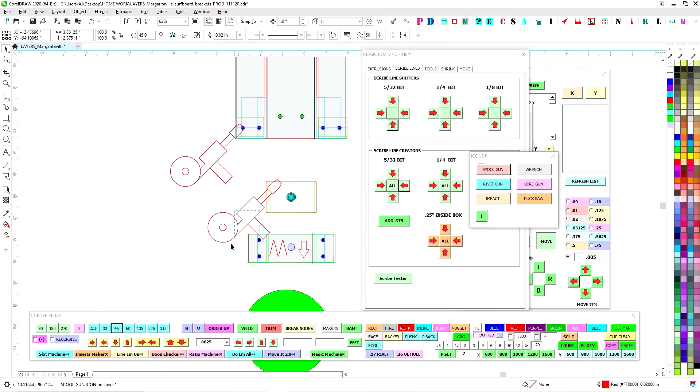So what you're going to do is weld this in. We'll give this a 315 turn. So we'll weld this piece in. Weld that. Let's give that a 45-45. Look, it's synchronized. And then you're going to weld that in. And then I guess they could weld this. I was thinking on the outside one here, they could just rivet it, probably be stronger, because there's not much to weld to. So I was thinking maybe on this side they could rivet these guys. Yeah, so that's it. So that should be a pretty good deal there.

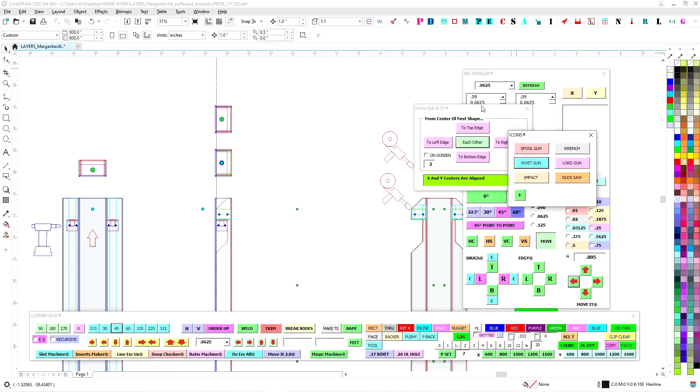Yeah, so all I got to do now is put this onto the various pages, but I've already done a video on that, so you could look that one up. But otherwise, I think we're good to go.